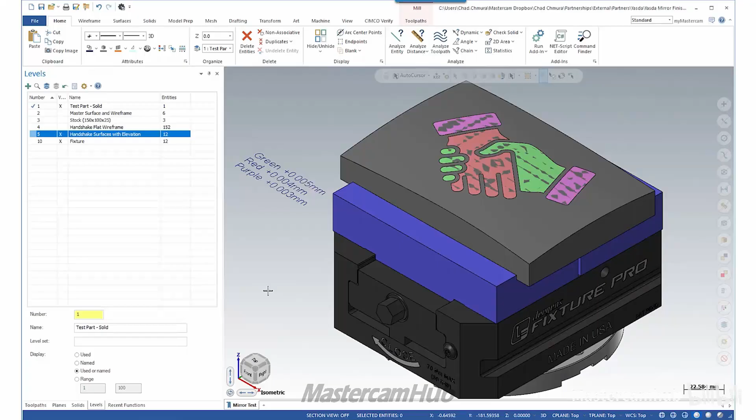So let's dive into the Mastercam file that created this part and kind of talk about some of the specifics about how we were able to achieve this surface finish in Mastercam. So on my screen here, you can see we're looking at the actual finished part with the 3 different depths of the embossing. So the green, red, and purple surfaces represent 5, 4, and 3 micron tall embossed surfaces.

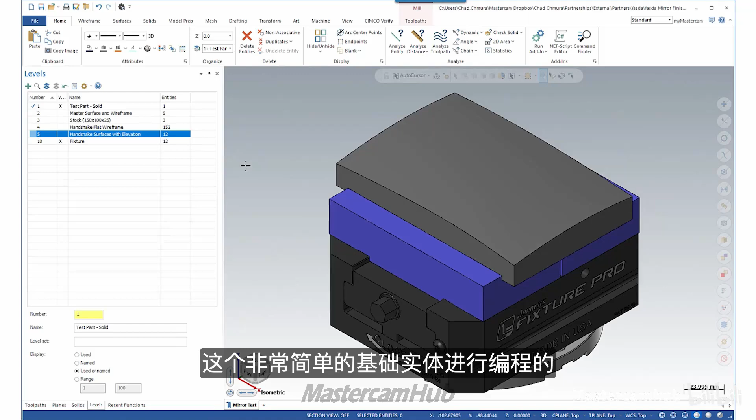If I turn these off, we see the actual base surface. So really, this whole part was programmed off of that single, very simple base solid. This is a compound curve, so you can see it's curved in both directions with variable radii. So really it's 2 splines that are swept together. And this is the actual surface we use to drive all of our finished toolpaths as well.

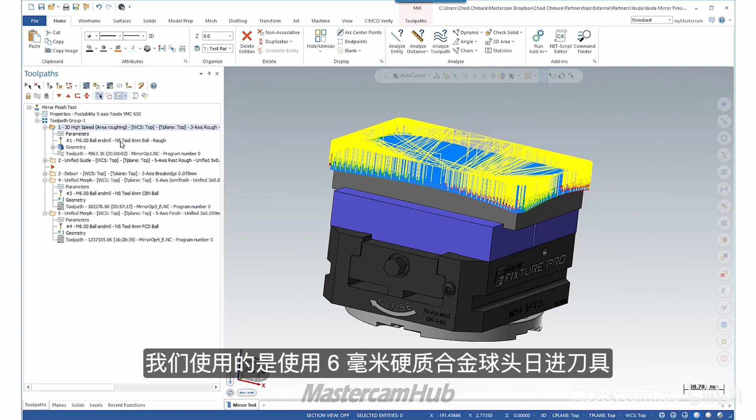Looking at the first toolpath, Op1 is just a traditional vertical 3-axis roughing toolpath. This is an area roughing toolpath where we used a NS Tool 6mm carbide ball. This toolpath ran in under an hour. It was about 45 minutes or so to rough the entire part. Of course, roughing the part like this, we end up leaving those stair steps from our roughing toolpath, which is where we come in with a semi-finished toolpath.

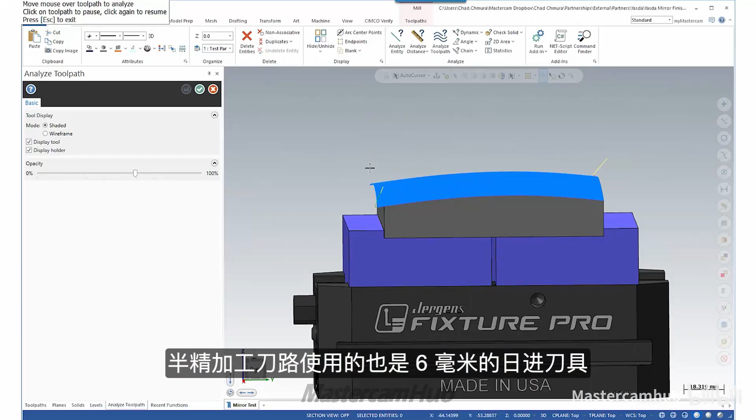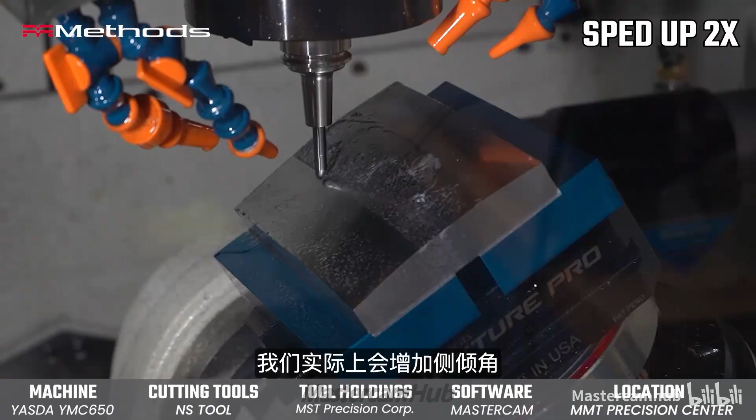So the semi-finished toolpath used the same cutter, 6mm tool from NS Tool. However, this toolpath is a multi-axis toolpath. So you can kind of see as the passes are going to run lengthwise across this part, and as the tool progresses along up this face, we actually increase the side tilt. The advantage of this is we're actually spreading the load of that cutter across a larger area of the functional area of the tool, increasing tool life.

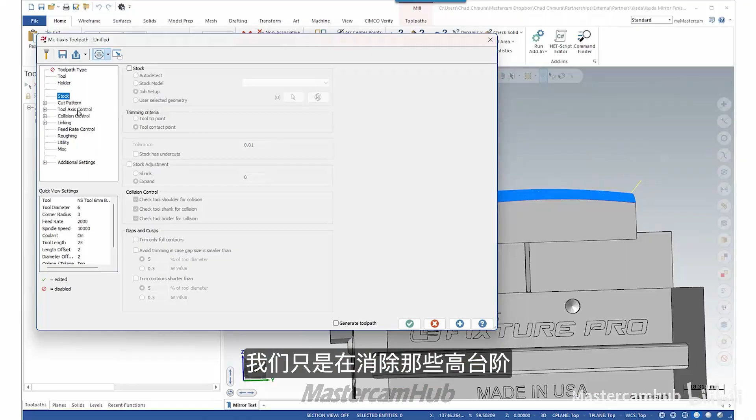This toolpath also ran for about an hour. Pretty much default tolerances on this one because we're just getting the part a little bit closer to the net shape. We're just really getting rid of those tall stair steps. The important thing to know in this case is that we're leaving 0.04 millimeters of stock, so 40 micron of material are being left on the part right now. And this has a pretty healthy step over of 0.15 millimeters.

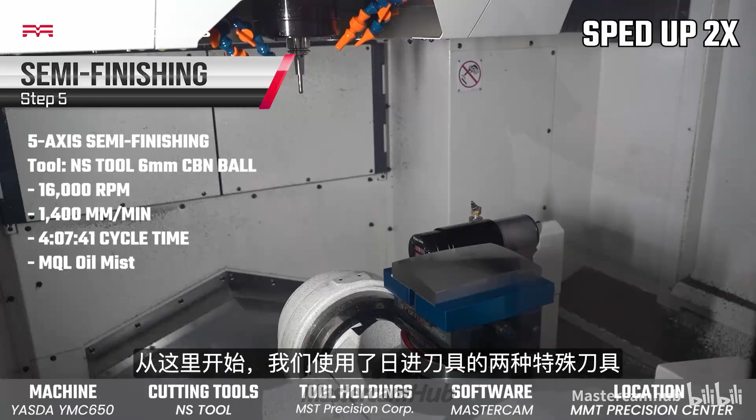Now, after that, we run a deburr toolpath. That just kind of knocks off any burrs from the roughing process. And then we get into the really cool, interesting stuff. So from here, we have 2 special cutters from NS Tool. The first one is a CBN ball end mill. This is also a 6mm tool.

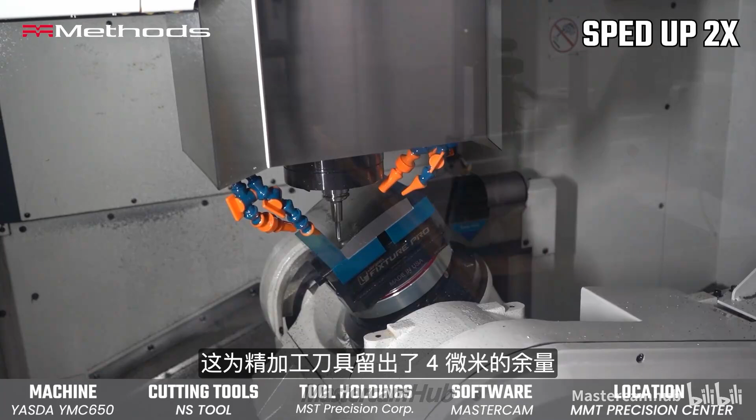What the CBN does is essentially gets the part basically right to size. It leaves a really nice surface finish. In some cases, this is already a good enough surface finish for most people. This is leaving 4 micron of material for the finish tool. That is hardly anything. It's just barely leaving a little bit of dust left. Cut tolerance on this toolpath is 1 micron.

Now, tolerance is where this whole thing is done, really, where we really need to make lots and lots of points to create as smooth of a flow of points across this part as we can. The more points we have, the more data we're giving the machine, the more control we have how that machine is being moved. We know that Yasda is going to move exactly where we tell it to, and it's going to do everything to perfection. So the code from Mastercam needs to be perfect before we put it inside that Yasda.

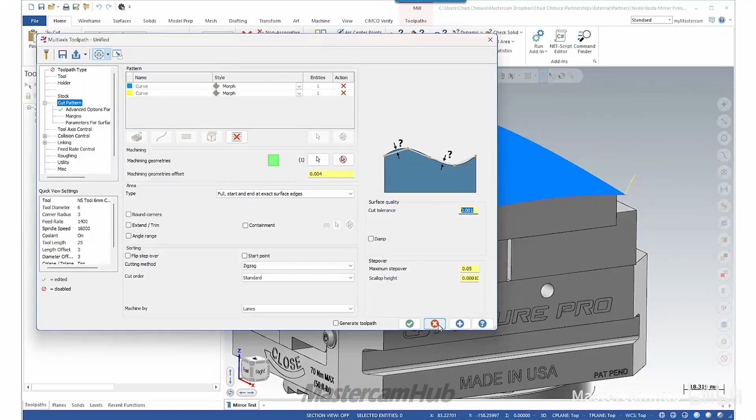The finish toolpath is really where everything is done. And one thing you might notice, we're using a unified morph toolpath. The morph is kind of an old school toolpath in Mastercam as far as multi-axis goes. We now have guide and automatic cut patterns. The advantage of using morph in this case is I have access to a chaining tolerance. Chaining tolerance and toolpath tolerance are 2 different things.

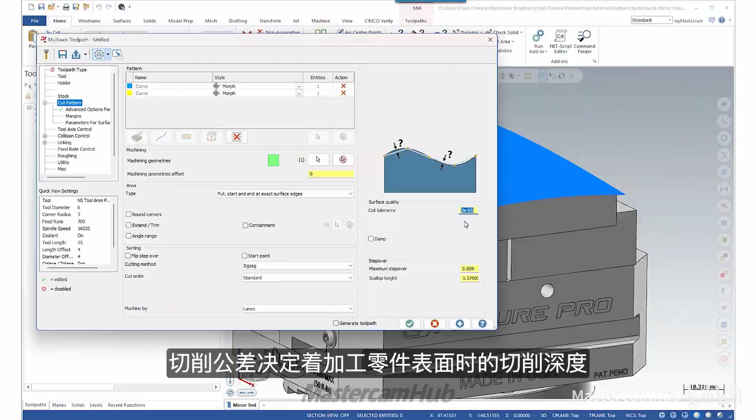So toolpath tolerance, right here, we have a 20 nanometer toolpath tolerance. This thing is making tons of points, and that toolpath tolerance has everything to do with how deep, with respect to that surface, the cutter is going to be. This thing is going to be within 20 nanometers of perfect on that surface. But the chaining tolerance is actually of equal importance when it comes to surface finishing.

So chaining tolerance is responsible for creating the actual morph between one edge of the part and the other. Now, you think this part's just a flat on both sides, but because it's a compound curve, that chaining tolerance becomes extremely important. So let's take a look at another part I have prepared here, just to show the importance of chaining tolerance. So here we see 3 different toolpaths with 3 different chaining tolerances. It's the same tool, the same cut tolerance. The only variable is chaining tolerance.

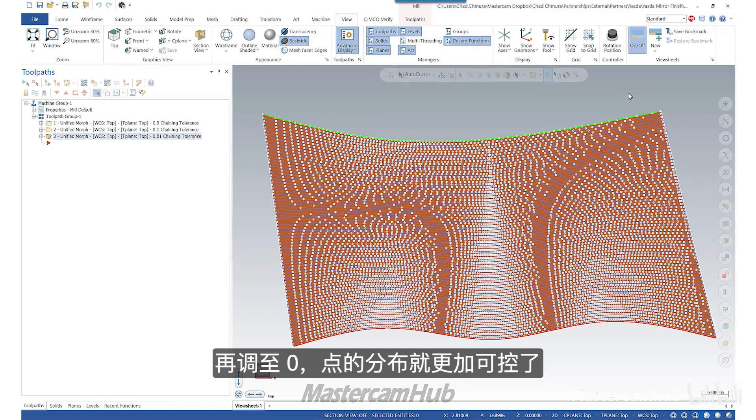So we're running a morph toolpath, just like with the surface finish part here. First, we see a 0.5 millimeter chaining tolerance. This is above the default. The default is 0.1. So we can see how the point spread changes from one to the other. The points seem really sporadic on the 0.5 millimeter chaining tolerance. Go to a 0.1, they really tighten up quite a bit. And then stepping down to the 0.01 chaining tolerance, that flow of points is much more under control.

Changing your chaining tolerance is a really fascinating way of controlling that point spread. Cut tolerance is extremely important when it comes to controlling the depth of your cutter with respect to that surface. Chaining tolerance does the rest. That is what creates your point spread, and it's extremely important to be aware of chaining tolerance when you want to create a really nice surface finish.

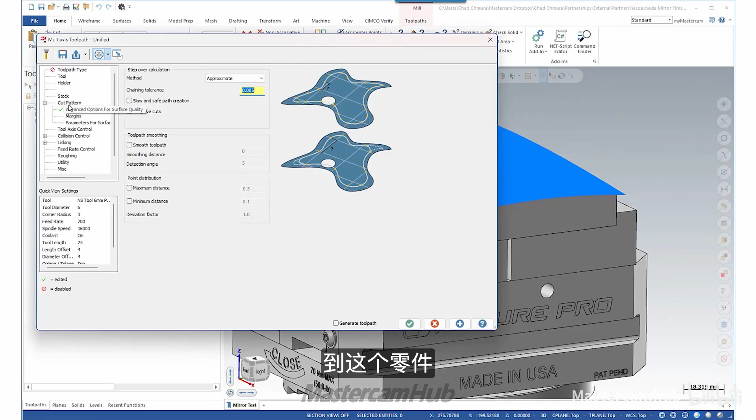So going back into this part, we can see this tool, this PCD ball end mill, is only taking off 4 micron. It's running with an insanely tight tolerance with a 9 micron step over. So this finishing toolpath with the PCD ball took about 45 hours to run. This entire part was done in just under 60 hours. So this is a really big part, a really big commitment. So Mastercam, NS Tool, Methods, Yasda all came together to produce this beautiful showpiece.

Now, in the next video, we're going to talk about quantifying just how great this part really is. We're going to learn about some surface finish measurement techniques and how they were applied to this part.